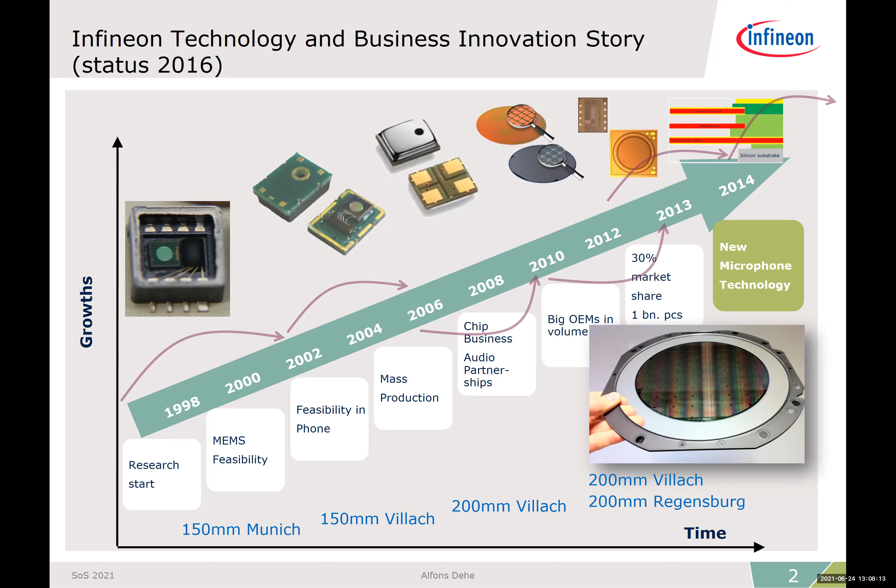Okay, this long background was just an example of how this works. Okay, fabrication.

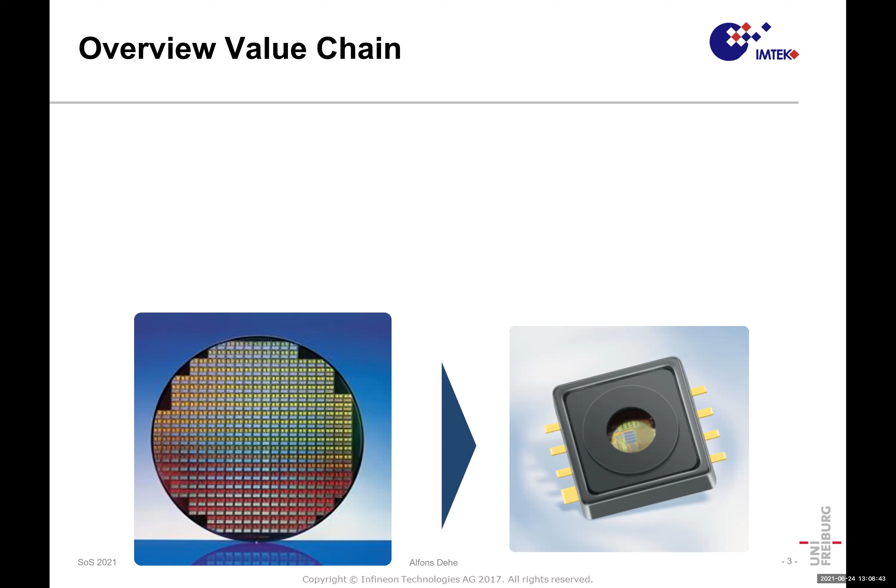Maybe you have already been in the clean room in IMTEK or somewhere else—everybody's fabricating those wafers. This is just an example, but the trick is to get this finally into a form factor which you can solder or somehow connect to the engineering world, because from the substrate to those devices is a long chain. We can sort this value chain or fabrication chain.

There are two areas: we have the front end and the back end fabrication. Front end fabrication means everything which is done, so to say, on the wafer level, and back end is everything which is packaging, which then bridges to the application finally.

And if we go into the front end, we see we have the raw material, the fabrication on the wafer, really all the steps that you do. You end this always with testing.

Also in between you have a lot of testing, we will see this later. And then if you do the testing, basically you start defining chips, because for each and every chip that you test on such a wafer, you have data, and they are kind of the representative of chips. But in between comes something like the grinding and the dicing, so make the wafers thinner, then you can separate by dicing faster. This is called the so-called pre-assembly. It comes before you do the assembly.

And after this, you enter into the back end. So while this part is done in the clean room, this part, the pre-assembly, is typically already done in a gray room or less high quality clean room, and the whole back end, of course, also in kind of particle low, but lower ISO classes. And then this we discuss later. So this is the way to sort all those processes.

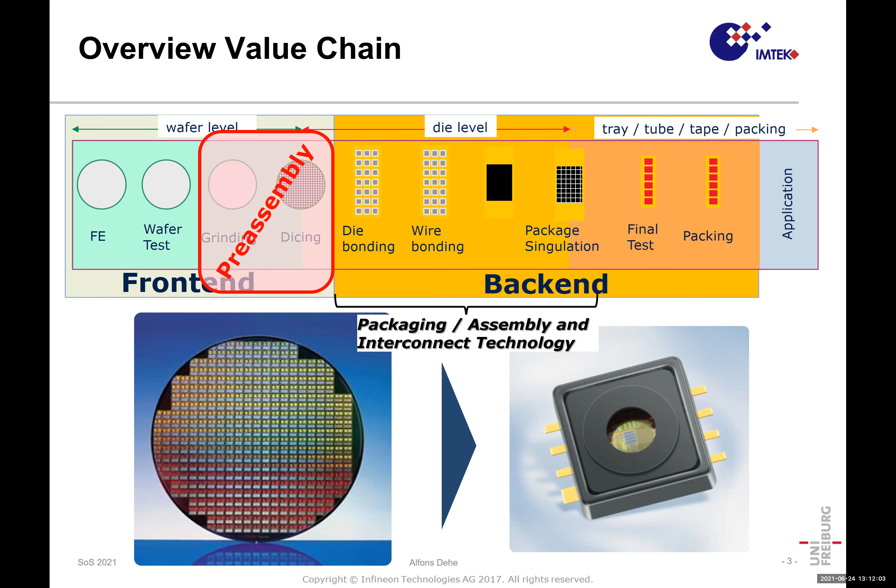And this is so important with the packaging. And we will see, of course, later on that the design that we do at the very beginning for our chip has to relate the whole backend processes already. You have to think about the testing, the dicing, the package, form factors, interconnects, etc. Okay, so this is quite holistic question, and therefore we run carefully through this. But we start, of course, with the wafer processing.

Yeah, so MEMS wafer fabrication. And I like to start with the ideas. Each design process starts with ideas, and so do we.

There's a variety of MEMS condenser technologies, like endless ways how you could do this. I showed already this patent cross-section of Mr. Sessler's idea how to fabricate a microphone with just a silicon substrate, a housing below, a hole in here, and a diaphragm which moves as a condenser against the second electrode here on the substrate. Quite simple.

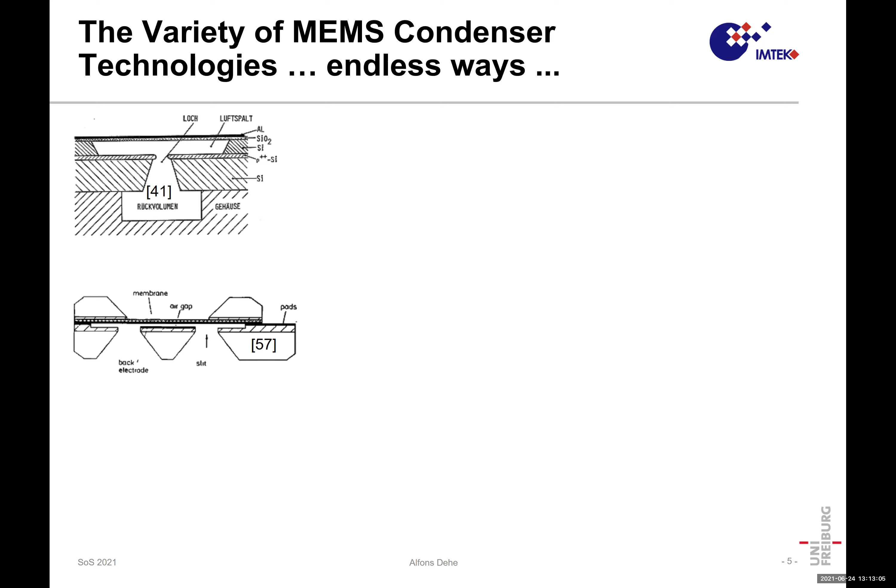And if you go from there, and the next examples, you see, oh, here they have an idea. I see from this sketch, this is a bulk micromachined wafer as an electrode, and a second wafer machined and put on top of this, serving as a membrane. So it's made from two wafers. Again, an example with two wafers stacked on each other to form this complicated backplate diaphragm system. Even a third wafer to get a back cavity sealed.

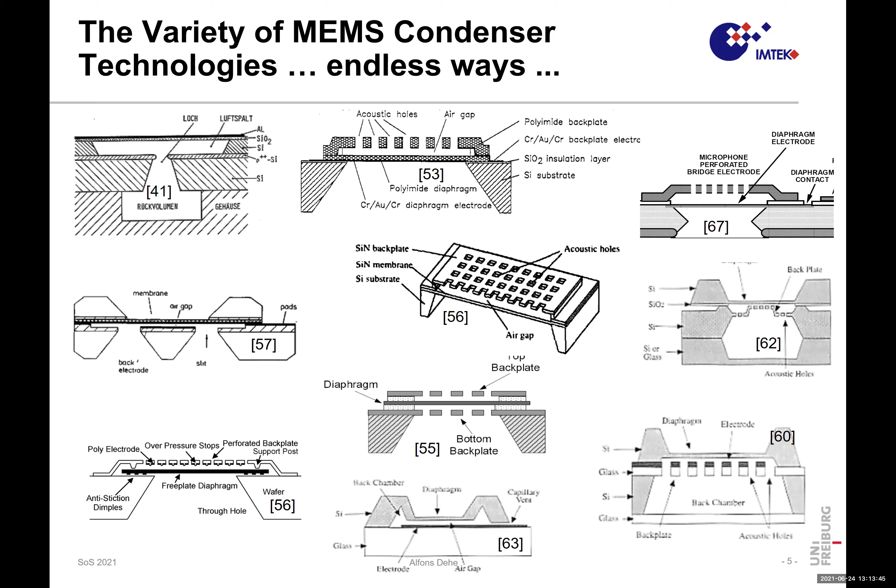So many ideas. Here again, something like a systematic, and we can move on and you find different ways and implementations, so many patents. And this is just maybe a snapshot. Every week you find still today new patents filed, especially from the Asian market, for new constructions, how to do the MEMS.

And everybody refers to the old ideas. Maybe the functionality is very simple. You always see here a gap and two electrodes working together, but everybody claims this process with the idea it might be better than others. And this finally is the argument to save your business with patents.

Okay, so what do they have in common? Capacitive transduction, and they have bulk micromachining. So always they have this big hole in the substrate. This is very common to all of these devices.

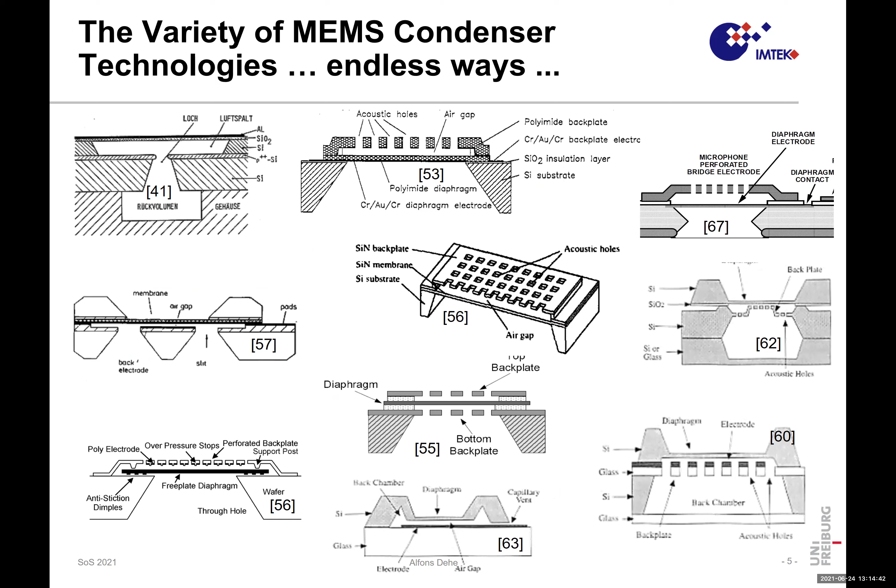It has to do, of course, with the construction, with the modeling that we have seen before, that you need to undamp the diaphragm. So this is in common, and everything else I say is more or less is different. So how they design the diaphragm, how they do backplate design and materials, of course. The way to form the air gap is also not clear, two wafer, sacrificial, and so on.

Then there's even what you don't see here, single chip or multi-chip implementations. This depends very much on your creativity, and you should make a wise decision on how to fabricate this. It's also very much dependent on your capabilities. Maybe you have a fab environment which is given, like the IMTEK. If you search for a solution to fabricate a MEMS micro for the IMTEK, you have a different ecosystem and maybe different ideas to do it than somebody coming from a highly dedicated CMOS fab. This is basically also a reason why things can be so different and still end up with the same quality in the result.

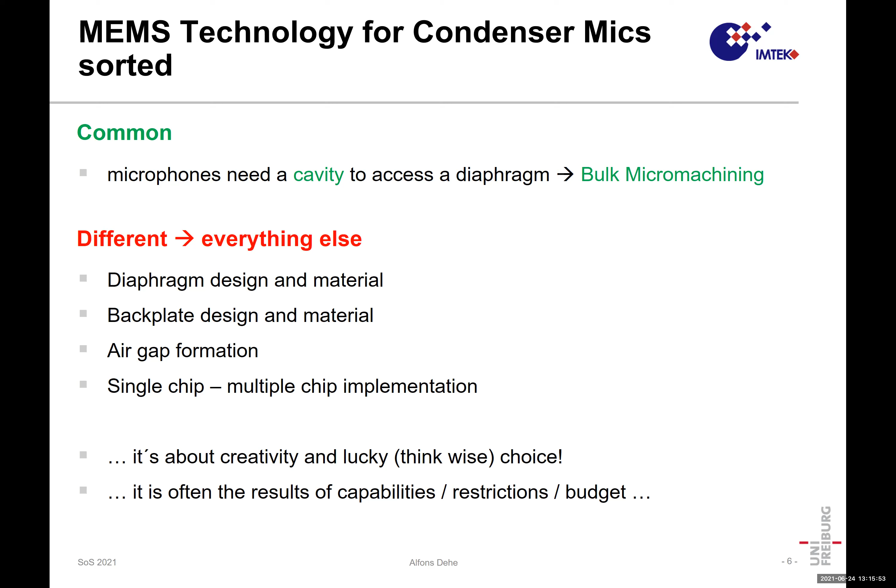Okay, bulk micromachining. This is how to drill big holes into substrates, or cavity etching. I'll give here three different ways this has been done, by technology, and then we have some examples.

A very old technology is isotropic wet etching. Isotropicity means you etch in all crystal directions with the same etching rate, more or less. This gives round shapes. The etchant used here is hydrofluoric acid, nitric acid, plus acetic acid. The reaction chain is quite complex, having to do with oxidizing the silicon and dissolving the silicon in this bath. The nice situation is that if you work on the triangle of those three chemistries, you can tweak the process.

You can tweak the process for etching rate. Everybody likes a high etching rate, but at the same time you have to respect temperature limitations, because you also tweak the temperature for the process, or you want selectivity against a mask needed for fabrication of the hole, which is typically an oxide, silicon oxide, rather than any kind of resist, because the resist would still be dissolved in this bath or would not be stable.

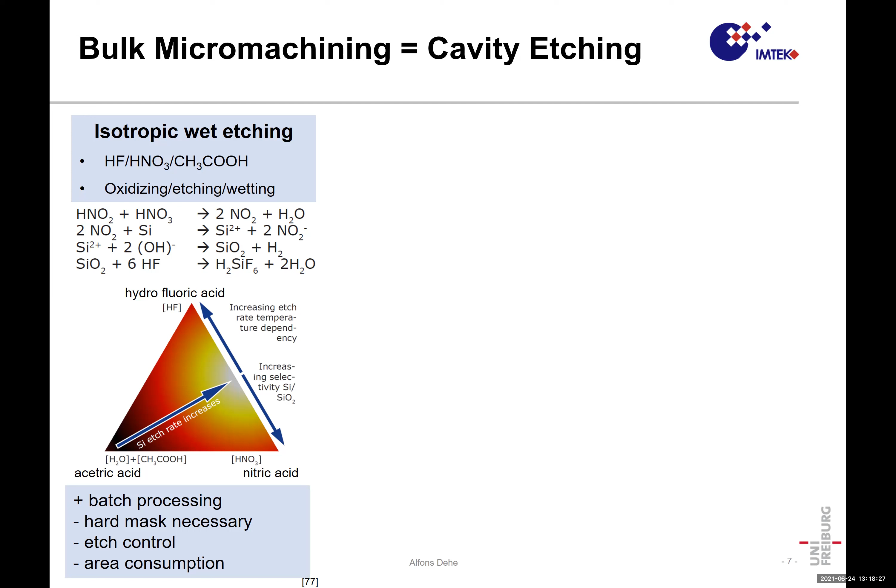So not long after this, everybody moved to anisotropic wet etching. Anisotropic is just the inverse - it's a wet etching that is sensitive to the surface energy of the different crystallographic directions of silicon, depending on the dangling bonds or the number of interconnecting bonds in that direction. Finally, everything ends up with 111 facets, which etch the slowest, the 100 facets, which is typically the wafer surface, etch fast, and the 110 direction is in between.

People learned this intensively in the 80s and 90s. There's KOH, potassium hydroxide, with very high anisotropicity, and TMAH with a little less. They differ in terms of surface smoothness, and again you have the same advantages and disadvantages. Of course, there's one more restriction: if you etch this way, you have a lot of design restrictions. And design is, of course, key in your devices, as we'll see in the examples later.

Then, happily, somebody was inventive at Bosch - Franz Lärmer and Mrs. Schilp. They invented what we always call the Bosch process, the deep reactive ion etching systematic. To sketch it a little, here's the first claim of their patent: it's a combination of SF6 isotropic etching and a C4F8 passivation. They claimed they achieve anisotropic plasma etching into a surface by combining this isotropic etching with a passivation layer.

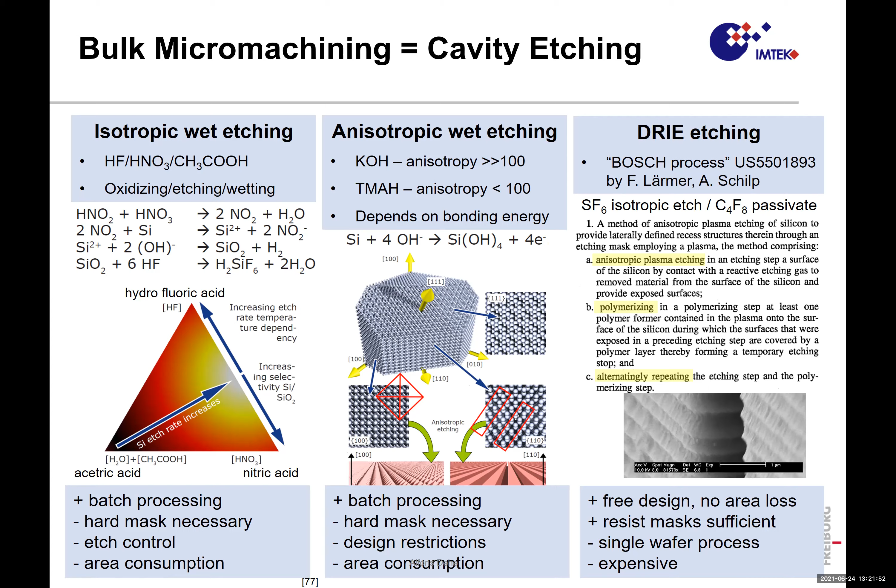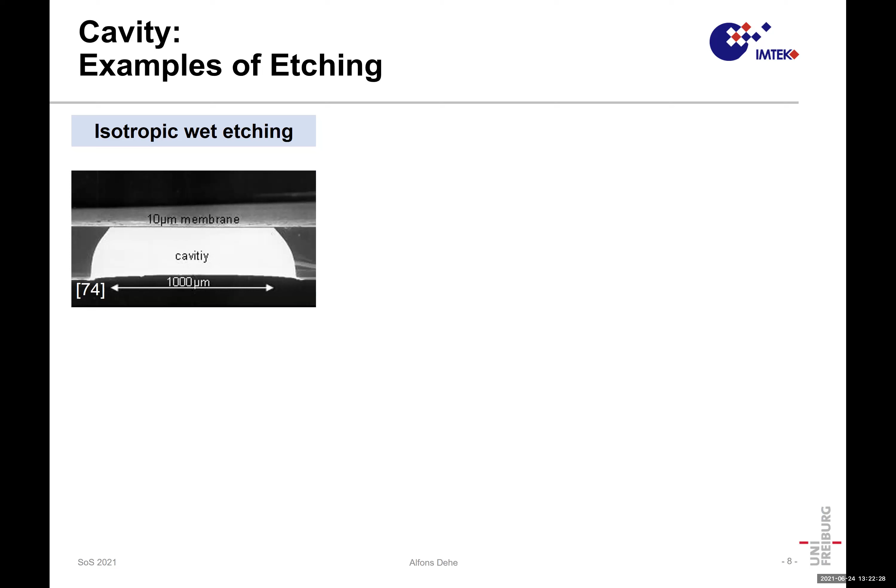So now I have some examples. This is really an early product at Infineon those times. This is a 10 micrometer silicon membrane with a bulk isotropically etched cavity below. So this belongs to a pressure sensor with piezoresistive elements on this silicon membrane. Very high throughput, has been produced for maybe 15 years this way, and quite successful, and even started microphone fabrication this way.

This is a lot of examples of anisotropic wet etching, where we see the chip's front side and back side, where we see the 111 facets. Here they are even mirror-like. Here you see the mirror, the picture of the diaphragm on the side walls just by optics, or also here you see something. If you cross-section this, you see what it means.

You have a freestanding membrane, which is very small compared to the area that the chip is consuming, because you have to account for this sidewall depending on the thickness of your substrate. And then you need still something for gluing or separation.

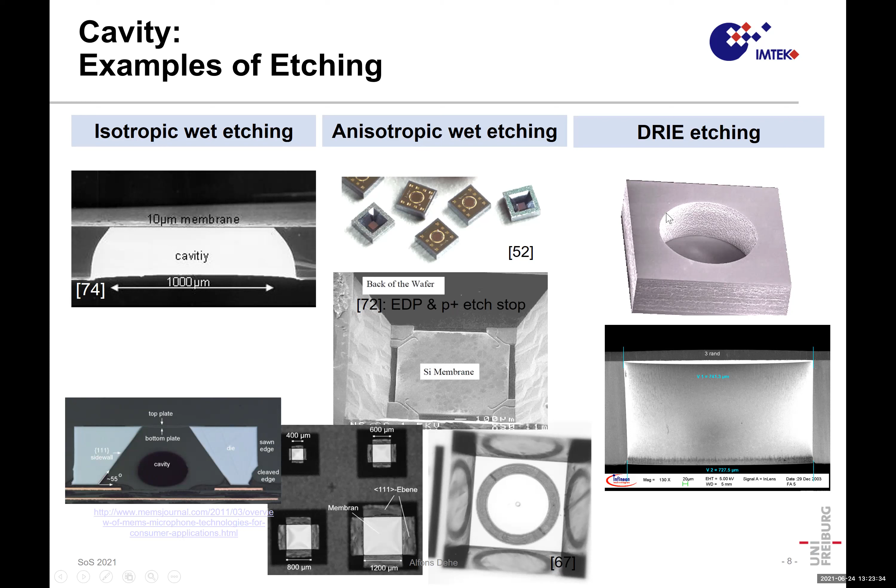And last but not least, these are typical dry etching structures for actual microphones. You even see that it's not perfectly straight etching into those substrates, but a little bit inclined. But nevertheless, this is when the MEMS got rounded, and this was quite a fascinating story that you finally had every shape you want. I give you a modern, and I put it in parentheses, this Bosch process.

Yeah, not really the scientific argument here. So this is a cluster tool from the company Oxford, but there are others as well. And this is like a professional two-chamber system with handling input, and all the fabrication is done then in those chambers.

This is typically the wall between the clean room on this side and gray room on the other side. And what you do in here, you take this kind of a Bosch process with this polymeric system. You can etch aspect ratios of 30 by 1, so 30 micrometer deep, 1 micrometer wide. And people try even higher aspect ratios. You etch at 15 micrometer per minute. This is quite good, but you know you have this scallop system.

Meanwhile, there has been established more or less in the same machine the so-called cryogenic process. Cryogenic, this is at liquid nitrogen temperature, 77 Kelvin. And this works a little bit different. In principle, this is immobilizing the reactants, and you finally end up with a perfectly smooth sidewall of trenches. This is an example of etching trenches into the depth, which are perfectly smooth, and they have smoothness of maybe some 10 nanometers. And this is so important for a lot of electronic applications where you want to implement electronic functions such as capacitors on those sidewalls. You cannot allow for roughness. And this is state of the art as of today, and is maybe a development which comes out of these initial learnings here.

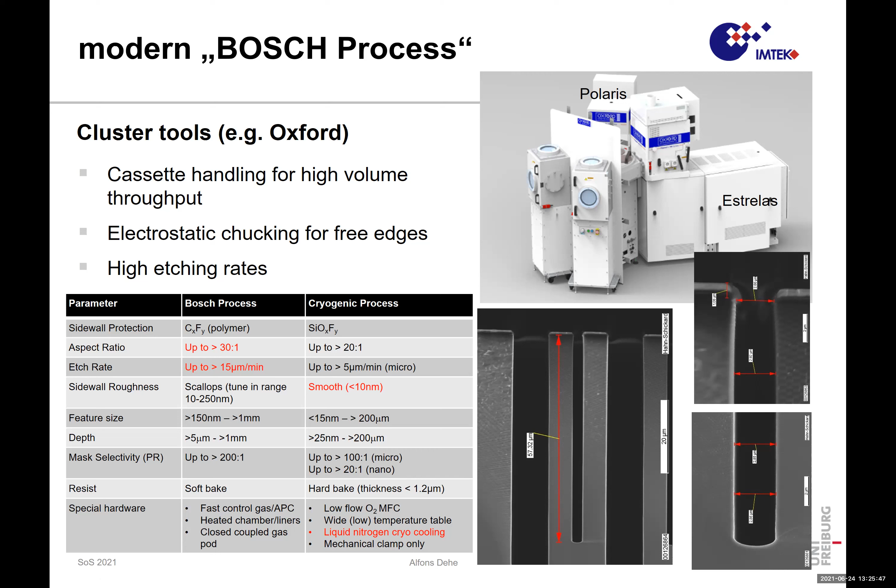Okay, and I have some more special cases, how people deal with these specific limitations. As I said, this batch processing with anisotropic etching is famous, has been studied for long times and implemented even in products. And people always try to optimize save area, because area is the most expensive parameter when you produce wafers.

And this is the result of a cross-section of a microphone coming out maybe in 2010 or so. And I asked myself, how is this produced? But you see the benefit. In contrast to what I showed before, the MEMS, the diaphragm area, compared to the chip area, is not so bad as before, because they have this special inclined cavity, and it is not straightforward to fabricate this.

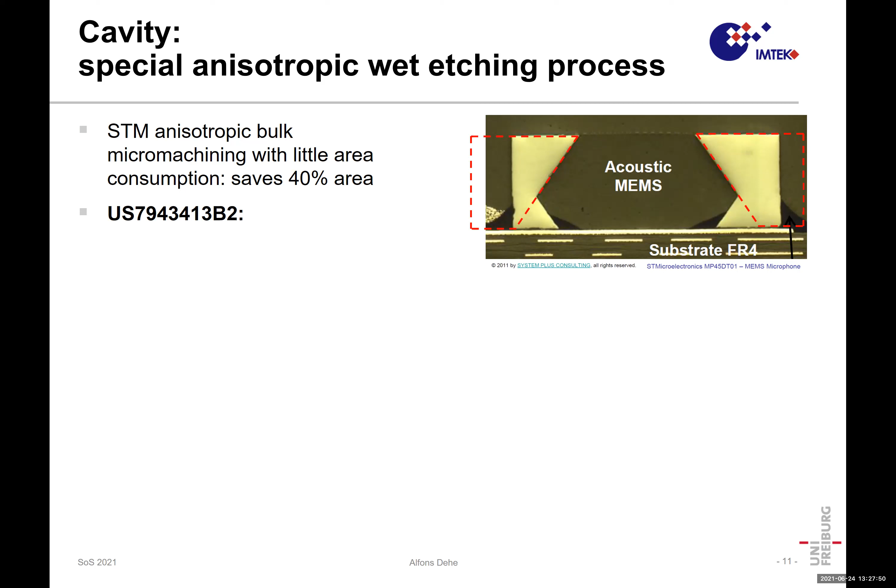So if I compare this to the classical technology, I would use this kind of chip size, and this is a 40% saving. When you get the explanation from the STM patent, I want to share this because I like it quite well. So if they produce all these MEMS structures, double membrane stuff like this on the surface,

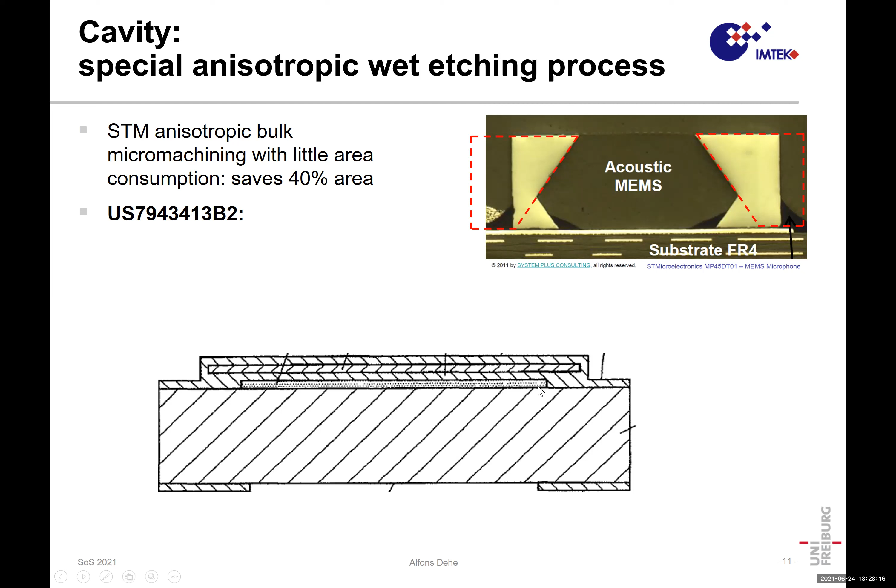they have a substrate with a mask on the rear side where they start the etching from the back side. But what they implement here is a special layer below the critical MEMS structure, made out of polycrystalline silicon, a kind of sacrificial layer. And we know that polysilicon etches faster than bulk silicon, the crystalline version.

And then you see how this is working. So if you start with this hard mask, no wonder this kind of cavity will develop. So you have only these 111 facets, at 54.7 degrees, and you end up in the center of this structure, and you don't have your whole MEMS released.

But now comes the trick: this polysilicon etches faster than the bulk silicon, and in a moment they etch away the sacrificial layer. And once this starts, you open up again the convex corners of the bulk crystalline silicon.

And of course, this edge is not a 111 facet, and this surface is not a 111 but a 100 surface. Then you continue etching from this side, and it develops further and further. Even here, this is not a stable 111 facet, because you still have a frontier going further and further, until finally the lowest energy surface develops, which is just this 111 facet.

And this is a nice trick, showing how to deal with, so to say, old technology combined with fascinating new ideas to gain the wanted result.

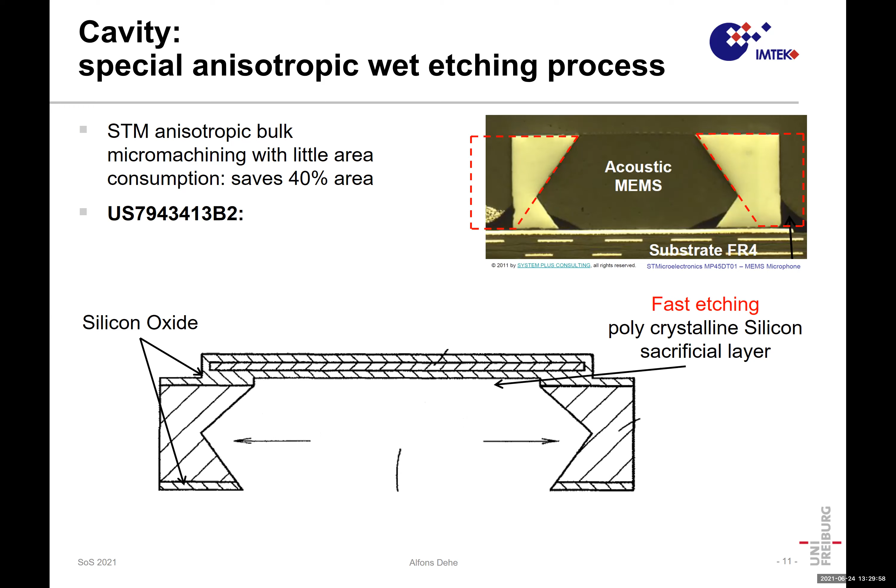Okay, another example is this one. When this was announced, this kind of structure is basically, from the cross section, a smaller membrane on a bigger cavity. If you were to etch straight, and this is still Bosch etching, you would only get a small hole and a small chip.

But for some implementations, maybe you want a small membrane and a bigger volume behind, producing back volume within the chip. And this is what they did. They needed to support the diaphragm in the center, so they used a kind of two-step Bosch cavity etching. Not too easy to follow how they do this.

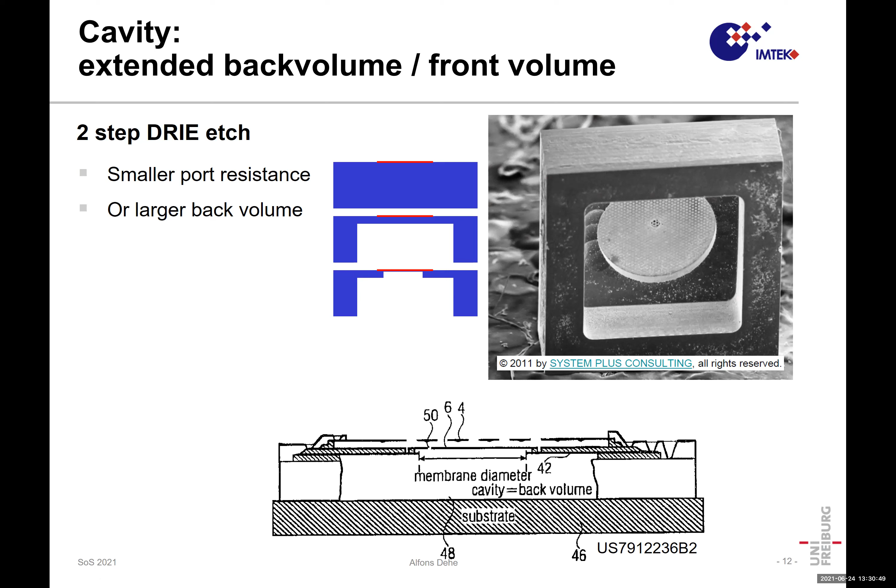Very special ideas of doing bulk micromachining. So now we have done the bulk micromachining, which in fact comes more or less in the last process step. Do you see this? I'll just go item by item.

Diaphragm formation: the diaphragm is made as thin as possible, typically using all materials available in the clean room. For example, dielectric layers from silicon nitride, high tensile stress silicon oxide, or polysilicon, or even polymeric systems can be used. Then you simply add an electrode on top of this, and you need to do a kind of stress control. Then you can fabricate these membranes.

The alternative is polysilicon, like in those cases, which has a certain doping, or even monocrystalline membranes. But there are different designs from different companies on how to fabricate membranes, and we have seen something about this. This is an example of stress-free plates or diaphragms.

Of course, you could use silicon-on-insulator structures, where you have maybe a 1 micrometer thin silicon, bulk silicon layer, on buried oxide on a substrate. This is such an example: you see the substrate, the buried oxide already etched, and a 1 micrometer silicon layer, with the rest on top. This could serve as a diaphragm if you etch from the rear side to finally form the Bosch cavity.

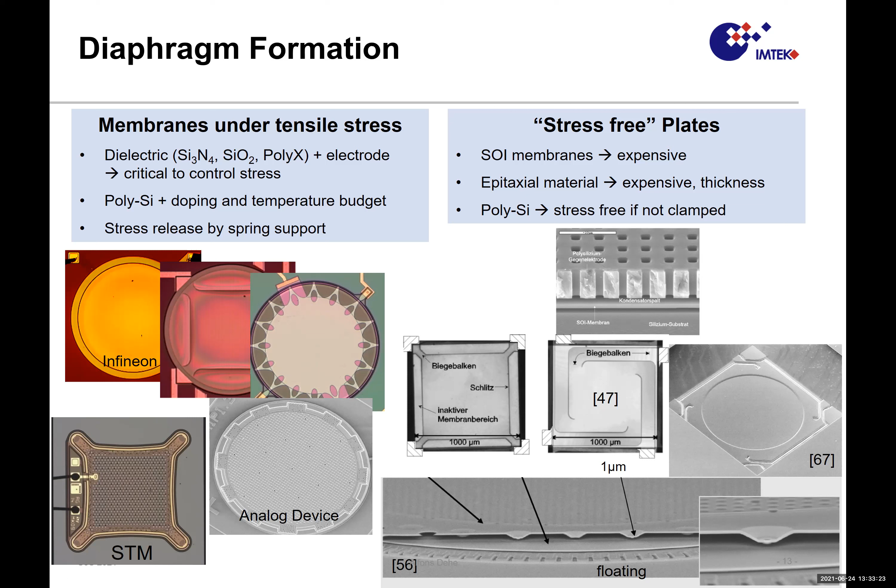Or you can even use polysilicon. More or less, you don't get stress-free, but you can release it in terms of what we showed before, these floating diaphragms. Sometimes you do a kind of carving into the diaphragm to make hinges, bending bars, or whatever, to support your stress-free plate situations. So there are many different ways.

Even you have kind of embossed diaphragms. What is embossing? Embossing means you have a tiny membrane, and you want a membrane or diaphragm that is tiny to have low mass. The low mass is important to get high resonance frequencies.

And you want to make it sensitive in terms of compliance. But sometimes, since we have a parallel plate condenser, it would be advantageous if all the diaphragm goes in parallel, like a piston, up and down with respect to the back plate. And this is what people try to do with embossing.

So they structure the rim of the diaphragm like a spoke system on top of the suspended cushion type of structure. And this makes the stiffness of the system, since the stiffness goes with the third order of thickness, still keep it lightweight. And then maybe they have a special spring support system in the edges where the piston is then connected to. And we find different ways like this one.

They have also a diaphragm which is supported all around with springs, but then in the center there is like a tube system, which is not high, maybe some 10 micrometer or 5 micrometer only, connected to a lower layer, which gives the whole system a rigidity so that it moves in the z-axis with simply a piston mode. And then you have effectively more capacitive change.

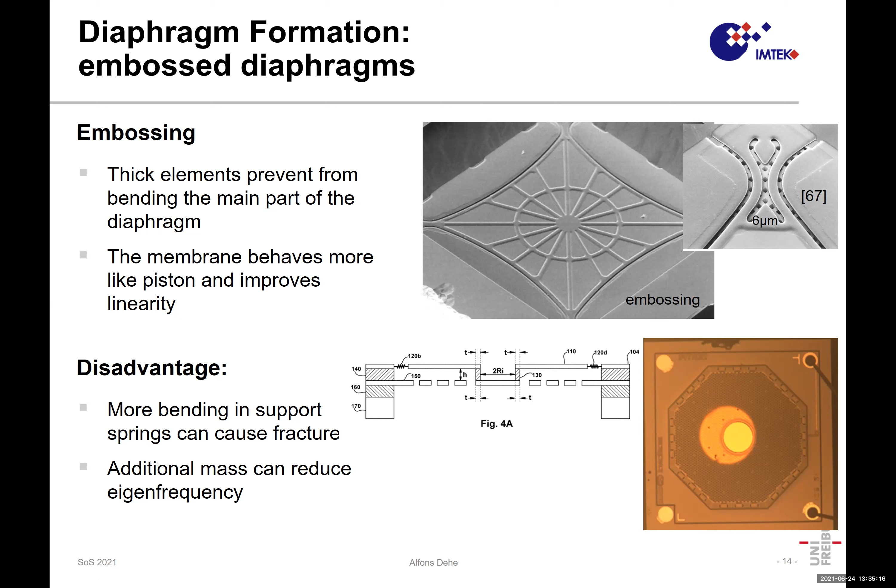Okay, cool idea. So now we have backplate formation. We had the cavity membrane. Now backplate, which is the stiff electrode. It should gain electric contact as an electrode. It should be stiff, or non-bending under acoustics and not bending under electrostatic forces. And it should have a lot of holes or some means to allow the air going in and out.

And these are some earlier examples of so-called galvanic bridge technology. It's a combination of resist as a sacrificial layer and resist to form galvanic structures, typically out of noble metal gold, on top of the chips. A technology which is, by the way, very famous for RF technology.

And yeah, you see thick, like 10, 20 micrometer structures, not too small in resolution, so it is limiting somehow. What you see in those designs always, this is even one out of my own early fabrication, is that they have posts. So this backplate is resting on the substrate only at certain points. And this is for the argument to have less overlap capacitance between diaphragm and counter electrode or backplate, to reduce the parasitics or improve the electrical situation of sensitivity and linearity.

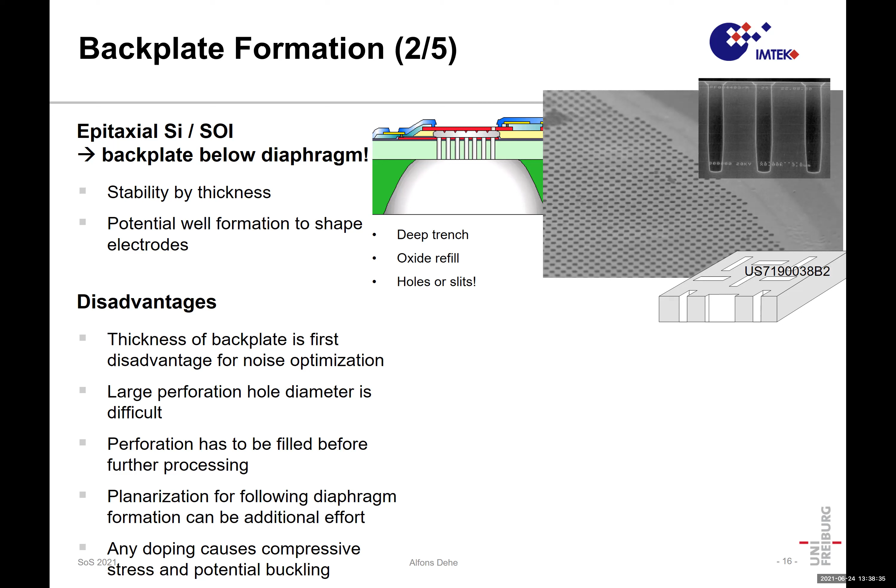So this gives basically one more degree of freedom, and having the same technology just with a slotted trenching would gain significant bandwidth, like nearly 10 kilohertz. And this is a way of being creative with given technologies to solve a system.

Okay, but of course, it's never enough. You want to have larger holes. Like in this example, this is already in SOI layer, like 5 to 10 micrometer diameter holes. But since you fabricate on the surface level, you cannot simply etch these wide holes into the surface and then continue fabricating membranes that should be flat on top. So this is something which is not too easy. And then again, it starts with tricks.

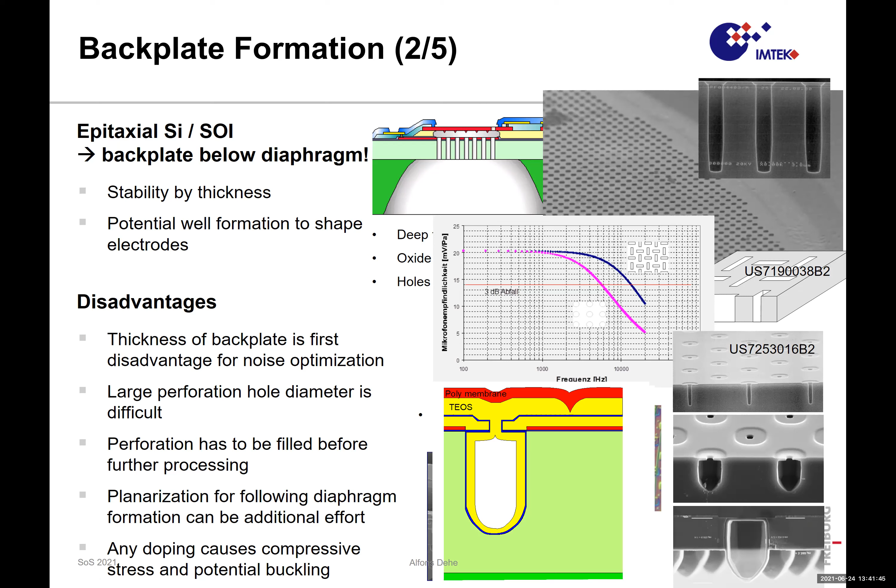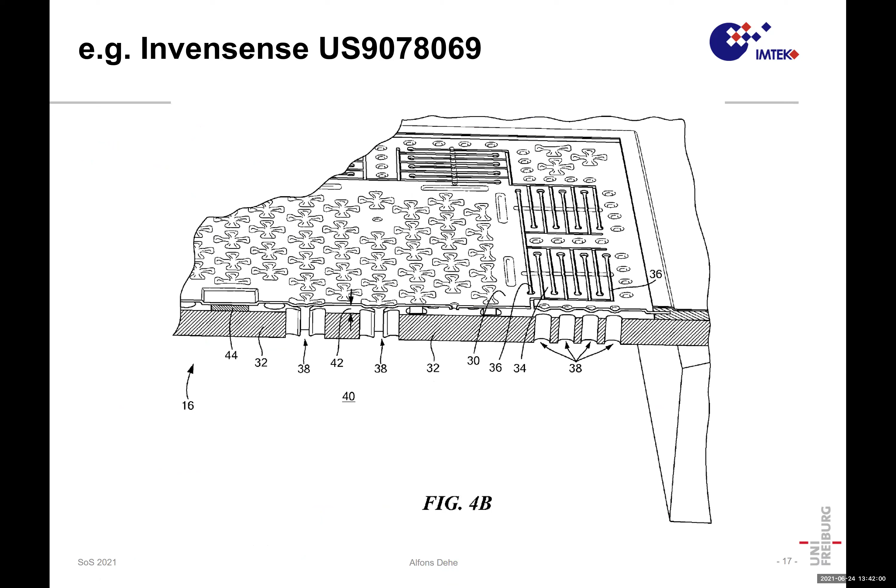So many ideas and development flows to generate really the best structure out of this. And eventually you find this at the competitor again. So this is really from InvenSense. Meanwhile, they are sold to TDK, Epcos TDK. Their patent that they published at a point in time. And really, when I saw the first SEM picture of their backplate, and this is really their backplate with this interesting structure, I didn't understand it at first.

And this is really a sketch of the microphone with the cavity, the backplate below, and the membrane on top. You even see that the membrane is supported by spring connections to the outside. And now I understand this, of course.

Basically, they want to have wide holes in this thick layer. But if you do the wide holes, you cannot close them by filling a sacrificial layer into this structure. But if you extend from the large hole these 4 pins into the direction of the center of the hole, and then start covering it again conformally with an oxide, for example, then you'll be able to close even the center of it. And then you have a little topology, but you have a closed surface, and you still see the image of this topology on the top membrane layer.

Yeah, and this was another approach from other inventors to bring such a kind of microphone technology in place. Very specific, and you never know for which reason you might use those tricks, even outside the microphone world.

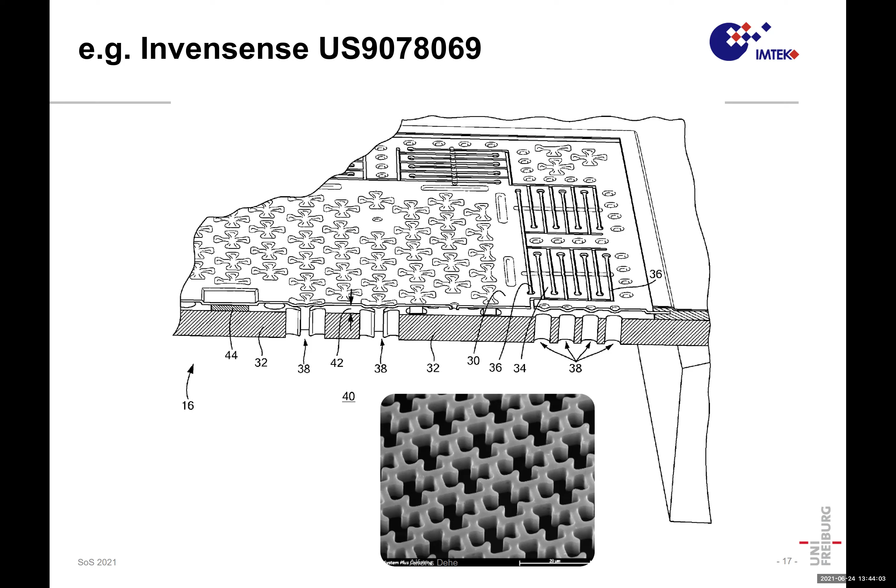Another point: everything so far was dealing with a backplate in the lower area and fabricating a diaphragm on top of it. Of course, it doesn't play a role in the functionality of a microphone whether you have the membrane on top or the membrane below, since they are in series with the backplate. It's not really a difference. You just have to take care of the potentials and the electric situation.

So next comes examples. Of course, maybe it is easier to do this thick backplate on top of the diaphragm. And this is again this SOI membrane structure with a sacrificial layer, or the gap, on top of it.

And here you see there's a production of polysilicon, a thick polysilicon, but basically it was formed using epitaxial technology. So you have formed maybe this sacrificial oxide only in a certain area, and the rest outside is blank silicon, like is used for transistor formation and so on. And with this, you go into an epitaxy machine. Of course, the crystalline nature of the bulk silicon is extended in the area where it is free, and you get epitaxial silicon at this area, and all the quality would be given on top of this, so that you can still do microelectronics in this area.

And that was basically the idea. But you have then encapsulated the oxide layers, but where the oxide is positioned is, of course, not crystalline, but polycrystalline silicon. You see this here from the cross-section. There's these grains to be seen. You even see the 111 facet developing again.

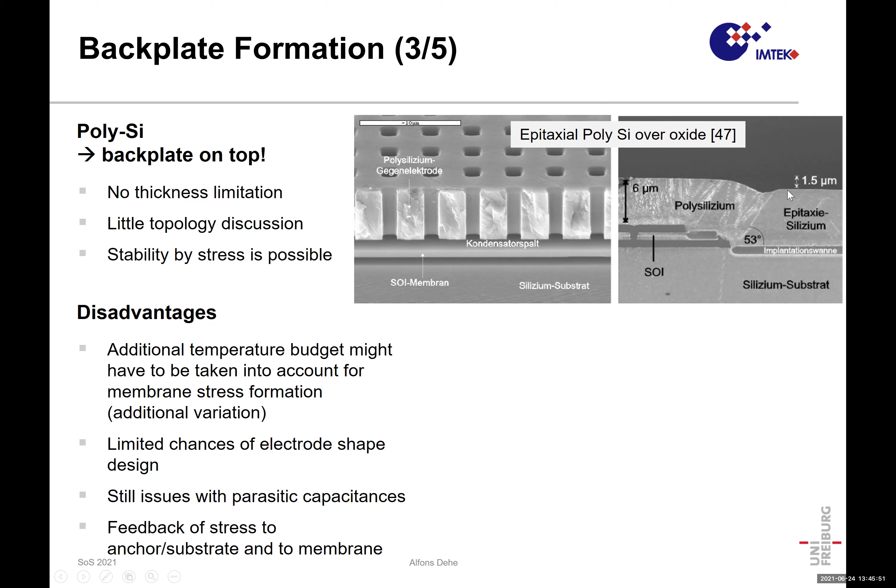The difference is the polycrystalline silicon grows faster than the epitaxial, which is more dense. This is simply to be taken into account for this little step here. Also quite a good idea to do something about it.

Finally, most solutions are meanwhile done only with tiny polysilicon layers. While the upper one was still thick and stiffness comes by bending stiffness, the tiny ones are combinations of small tensile polysilicon strained in addition by maybe high tensile silicon nitride.

If you do this and anchor it at the side, at the end of the membrane, you can anchor those backplates nicely, or even do cutouts to reduce the overlap capacity to the membrane. There's a lot of design freedom.

There's just one argument: all the stress that you put into the layer of the backplate is anchored on the substrate. And if you then cut out your chips finally, this force works on the chip edges, so it would somehow compress the chip area edges. And this compression finally has again a force working into the membrane, which compresses the membrane a little bit and works on the stress level of the membrane. So this is something which you discover during the course of your fabrication and finally testing procedures.

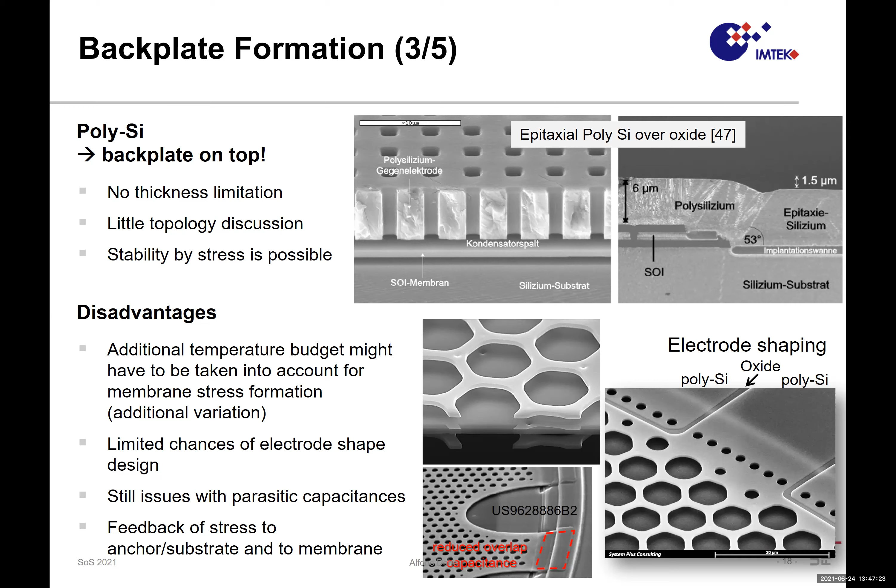And I have yet another idea how to come along with tiny backplates, but still stiff. We have seen this trick before.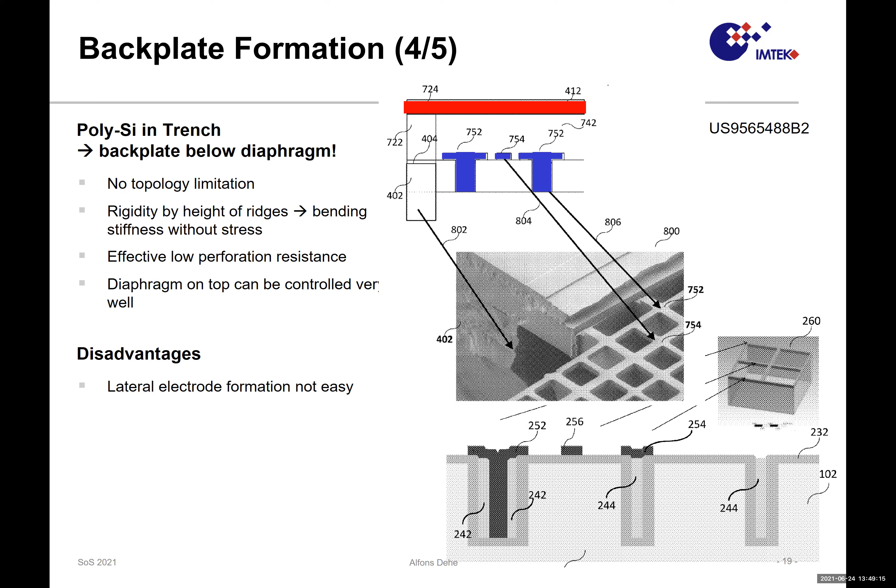And yet another one, backplate. What you see are really composite backplates, in this case polysilicon and I believe silicon nitride. Yes, here very thick silicon nitride, basically from a passivation layer which they use. And also company Knowles uses this combination as a dielectric backplate.

And if you zoom in, you find here's the dielectric stuff, silicon nitride basically, and you see the polysilicon contact for the electrode only in an inner portion, developed into the area where the holes are, as well as where you do the sensing of your membrane movement.

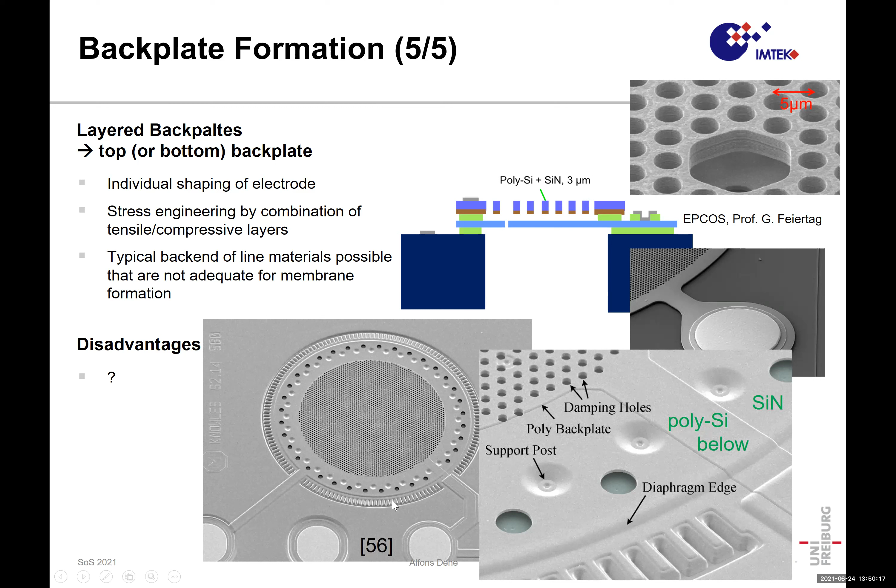So one trick in this diaphragm or backplate is how they do the edge. This edge is a complicated three-dimensional structure where this backplate is resting on the substrate, and this, as I have in mind, was invented to mitigate the stress of the structure with the substrate and get it nicely flat. So everything is typically patented.

Okay, yeah. So we have all the elements, but we did not discuss the missing part, the air gap, how the air gap is formed. I always use the word sacrificial layer technology.

This comes basically from the surface micromachining technology, and it's a good way to fabricate tiny gaps, even three-dimensional structures.

And yeah, to implement such a sacrificial layer technology, you again have to check the design. So whatever you do, undercutting - you need to control the structure width, the etch rate, like the perforation of the backplate, for example, so that you get a time-wise release of your structure.

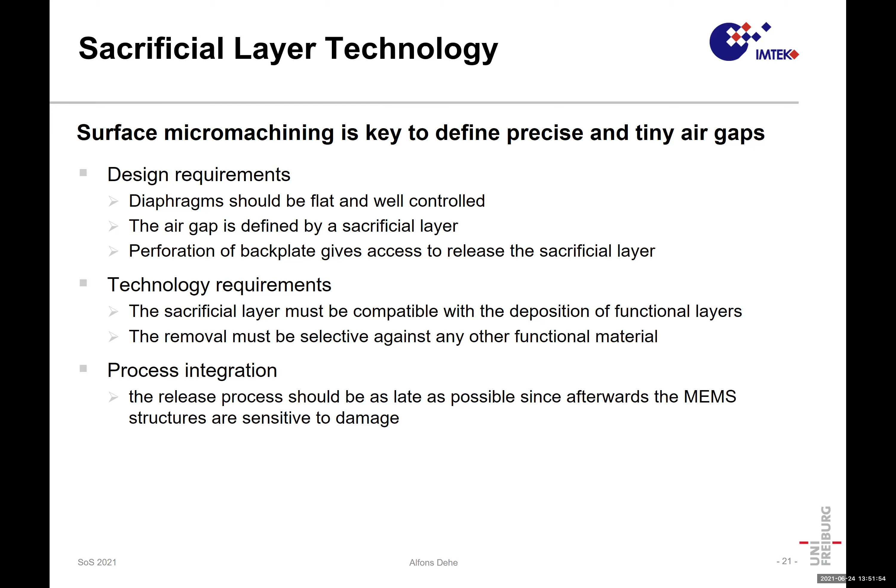You have to, of course, make sure that the functional layers will not be etched while you remove this sacrificial material. So it's a question of material choice. And then all this must be integrated into your process without harming the MEMS itself or the sensitivity of diaphragms, etc. So it's not trivial, but it can be done, of course.

I have here a table with the different functions and materials available in the clean room that I have in mind. We want a backplate, a membrane, and a sacrificial layer in between, whether top down or bottom up, I don't care. You have resist, imides, metals, oxides, nitrides, even silicon for a sacrificial layer. And then we have the choice to combine those materials.

So if I've decided I want to do my backplate out of metal on a polyimide, for example, and even use the same materials for my membrane diaphragm, then I can even use the resist itself as a sacrificial layer. Very simple implementation.

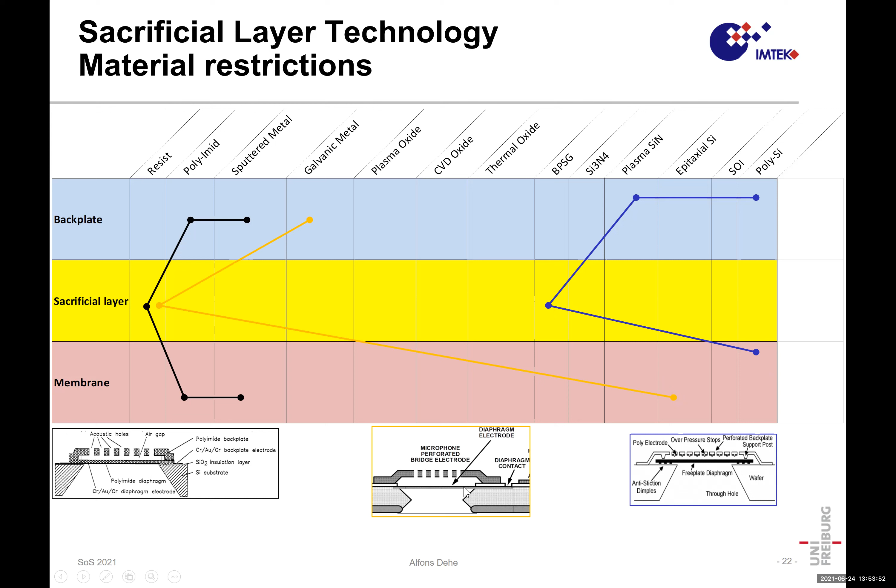Then this one is maybe an epitaxial layer, which is this diaphragm here, and the galvanic top electrode. This is the picture I showed at the beginning. Then you have again resist as a sacrificial layer. So many ways of doing it.

Finally, for example, this one from Infineon with CVD oxide as a sacrificial layer, because nitrides and polysilicon hold against this oxide. And those oxides are typically standard in the stack of metals and stack of typically used CMOS structures.

Okay, various choices, and the question is how can this be done? How do I get this oxide out? There's a special issue. If we do this in a liquid, surface forces and capillary forces attract surfaces as you dry out the liquid, because the van der Waals force and surface tension of the droplets bring the surfaces closer into contact. This is stiction.

Stiction is an issue. If you had two pure diaphragm and backplates etched in hydrofluoric acid, then you have two clean, perfect surfaces, and you start pulling it out of the bath. The surface tension, while getting out of the water, finally pulls the two devices to each other, and you have a van der Waals force so strong it would never release the two items anymore. This has to be prevented.

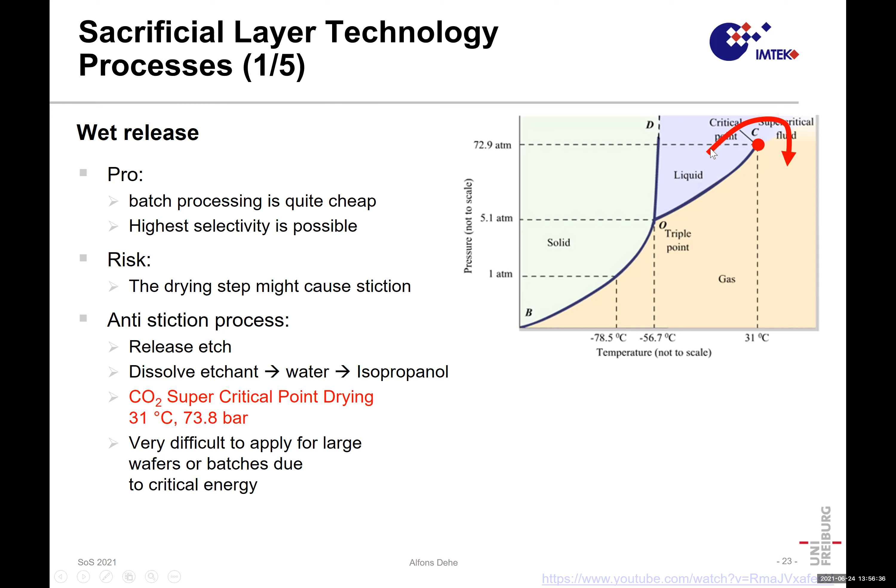So basically you put your wet device into liquid CO2 at high pressures and a given temperature, and then from there you start heating up and pressurizing your system, and then you go down again with the pressure at a higher temperature, and at this point you are in the gaseous atmosphere.

Those so-called supercritical point dryers are typically used in labs, and I've also worked with such a chamber. You see here thick walls for high pressure, 74 bars typically, and I have a little video showing there's a liquid phase and a gas phase on top, and at the critical point it is simply gone, the phase. So the liquid phase or surface is vanishing, and so is it in the whole volume.

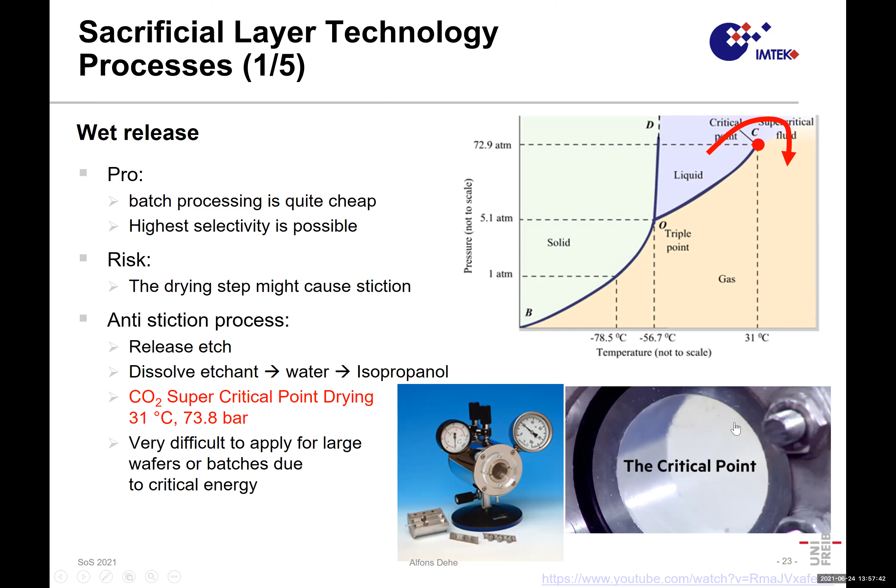So if I put my wet sample into this system, fill it with liquid CO2, then the liquid is dissolved in the CO2, like propanol, for example. And then you get this nice change, and afterwards you open up, and everything is perfect and dry. So this would be one way.

Of course, now think of this chamber for a 6-inch or 8-inch wafer, or a whole batch. You can imagine these are super big chambers. I've seen such a device fabricated for 6-inch wafers. That was a mess of a chamber, nearly 1 meter in diameter, to run the process for each and every wafer. And there were like 8 screws on top that the operator had to close each time. It's not really a productive level finally.

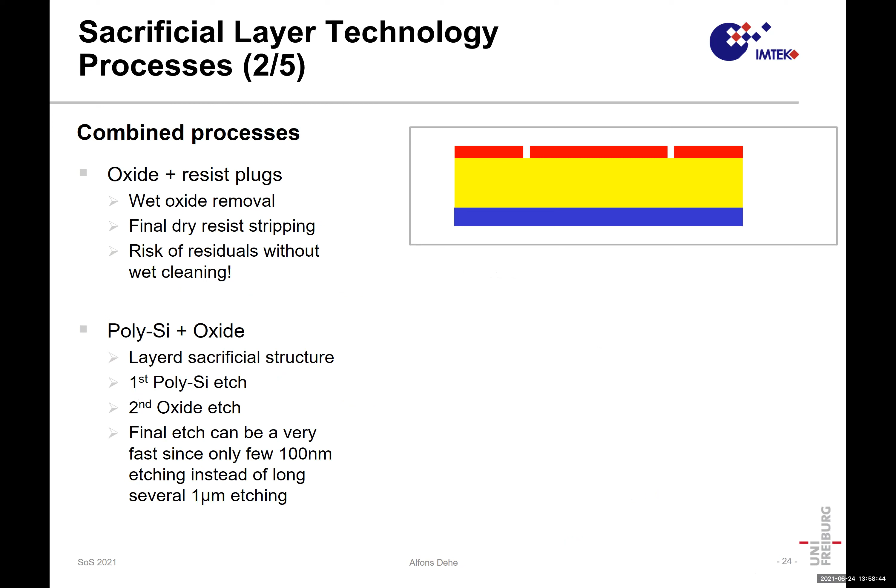So people are looking for something else. This is good for lab and maybe even at IMTEK, but not for production. Some tricks, maybe you try to help with resist. This is a very simple structure, maybe a membrane oxide and a polysilicon with some holes.

We have been trying to release or etch oxide below those tiny holes. We can fill this with photoresist again. In the next step, we can remove the oxide around and finally release them by plasma etching with oxygen, then remove the resist again.

This is a way, never really reliable, but it's a trick, and not too favorable. You can also do tricks with polysilicon. I won't go into this, it's a little bit more complicated.

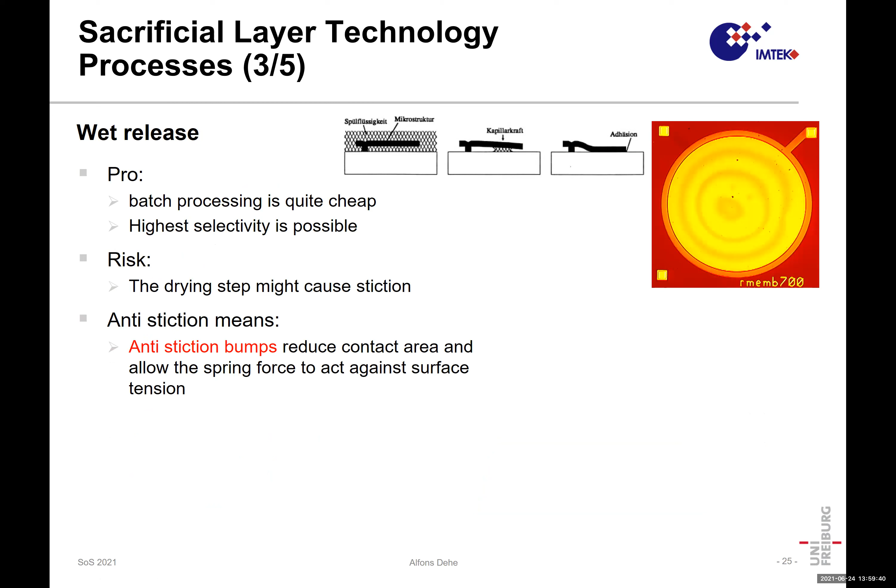What people try to do nowadays, or very early started to do, was anti-stiction bump technology. Again, just a simple reminder: you have a cantilever, you have capillary force when you dry it, and this keeps it adhering to the surface.

I also have a picture from a microphone. This one is 700 micrometers in diameter. From the picture, you see the center is sticking, giving a kind of smiley face. You see rings of different color, which is simply the tiny diaphragm on top shining through, and you get the Fabry-Perot effect.

So these 1, 2, 3, 4 fringes times half the wavelength gets you 1.5 micrometers of air gap in between. So you can simply control this. This stiction from flat surfaces, you need something to prevent it.

The invention, and an idea quite common today, is anti-stiction bumps. How can you do this? Basically, you define your sacrificial oxide, put a tiny hole, maybe 1 micrometer in diameter. You fill again some oxide on top of this to make it more narrow and get a smaller tip shape, and finally you can put your diaphragm material on top of this.

If you then remove your sacrificial layer, you have this kind of anti-sticking bump or dimple, like tiny needles in your diaphragm, so that if it gets in contact with the backplate, the contact force is much smaller than the total surface, and the restoring force of your diaphragm, which has a given compliance and spring force, is strong enough to separate those two surfaces from each other.